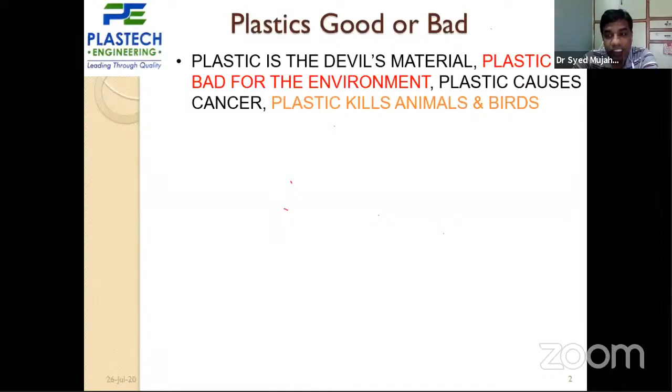Everywhere you can see plastic flowing - on land, on trees, everywhere. A lot of plastic waste is there, and even animals are dying because of this. They eat these plastic bags, plastic bottles which are small in size.

Plastic is normally a non-degradable material. If you keep plastic as it is for 100 years, it will remain the same. It may not destroy like normal metals and other materials which are biodegradable. So because this material is not biodegradable, problems are coming.

So wherever this plastic is there, does this plastic come itself? Is it grown on trees, or planted on the land, or grown in the sea? No, right? It's not given just like that, it's not grown there. It is we people who are not using it properly. After using it, we throw the plastic bags and bottles wherever we want.

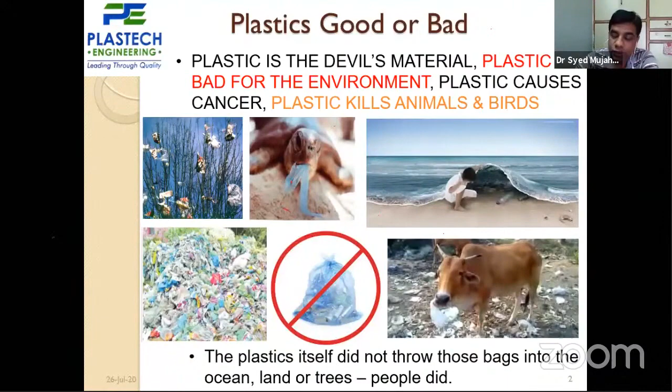If we handle plastic bags properly, and properly recycle them, whatever pictures you've seen previously may not come about. We shouldn't talk about the bad effects of plastic, calling it a bad material that causes cancer. All these things are just an attack on the material - it's just a perception of individuals. As such, plastic is not at all bad.

Anybody can say that after this presentation. If something we are doing - if a student is writing an exam in a class of 60 students, for a subject like production technology, material science, design, mechanical or computer science, whatever subject - and the student fails the exam, who do we need to blame?

Do we blame the pen which wrote the exam, or the student who is not prepared well, or doesn't have sufficient knowledge, or didn't attend the exam or the classes? Whom do we need to blame? We never blame the pen, right? Who is writing the exam.

But here, what we're doing with plastic, we're doing the same thing - we are blaming the pen. The student failed because the pen was not written properly. Is that correct? That's a myth, right? This is a wrong perception, and we need to remove that perception.

Whatever plastic is there, if we have a proper disposition system, as a person we need to throw plastic bottles or bags in a proper place, and send it for recycling, then these problems never come. Proper disposition systems are there in most developed countries, I can say.

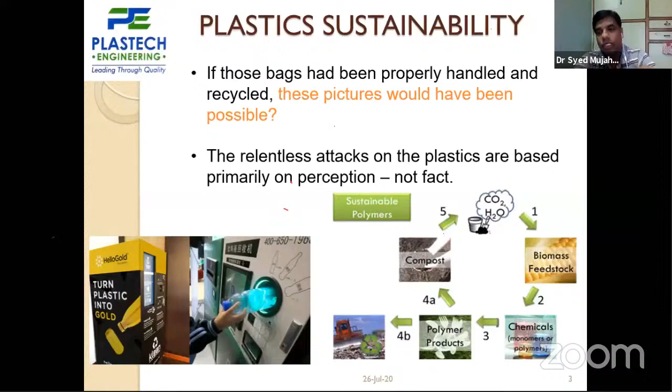Almost all polymers are basically hydrocarbons. Along with the hydrocarbons, we may have other elements like fluorine, chlorine, and other things. Almost all students studied about polymers in organic chemistry, in 10th or 10 plus 2, so you know about all the polymers.

All these things have to be taken care of by us as individuals. 80% depends upon persons individually, and we also need a system. Municipalities or government have to take care of that and put in place a proper system for disposal of plastics, sending single-use or multi-use plastics to recycling plants so they can be recycled and reused again.

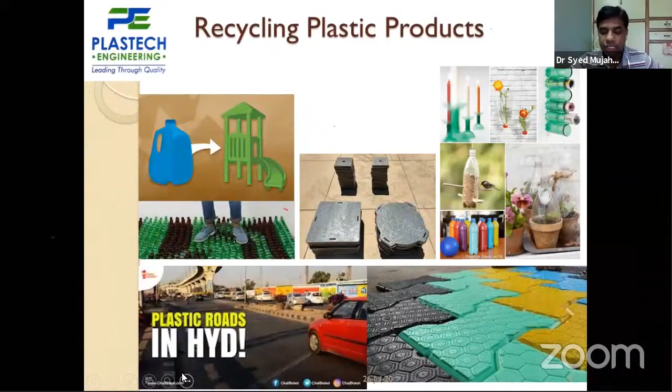So whatever things we are using, like plastic, instead of scrapping it and throwing it on the road, we need to send it to a recycling process, and in that recycling process we can use a lot of things.

The second perspective coming up nowadays is, why use carry bags? Go for paper bags. Now if you go to any super bazaar, people stop giving you carry bags or plastic bags. They're using either cloth, fabric bags, or paper bags.

Because price-wise, cloth bags are a little higher in price, that's why most supermarkets keep paper bags. So I want to show you the differences between paper bags and carry bags, and whether paper bags are really good compared with carry bags.

So where is this extra 82% energy coming from? Mostly 80% of our power comes from thermal or hydel power plants, where we burn fossil fuels. By burning fossil fuel, we liberate carbon dioxide, carbon monoxide, and other harmful gases.

So think about how much energy is required. Almost 6 times more fuel is burned to make one paper bag compared with one carry bag. So in terms of energy consumption, carry bags are good.

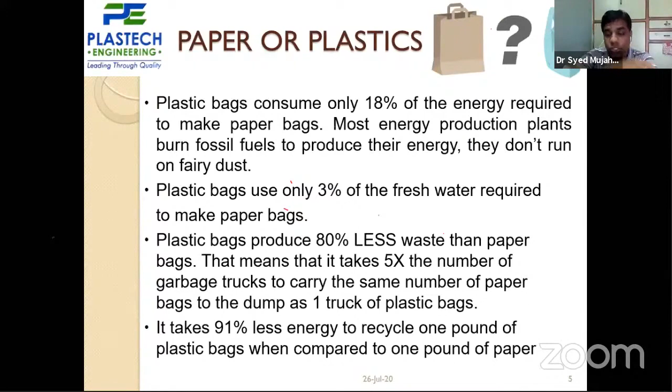Now we're going to cover the basics of plastic. Everybody knows plastics are nothing but polymers. The word plastic comes from the Greek word 'plastikos'.

The meaning of plastikos is moldable, so any moldable material is called plastikos. Plastics fall under organic chemistry, which you may have already studied.

Plastic is a polymer. In a polymer, there are a number of mers. A single unit is called a monomer. When monomers join together, hundreds of thousands of monomers form a big chain of molecules.

This is a unique class of material, a very good material actually. You cannot find this kind of material elsewhere - it's a wonder material that came into existence by virtue of its superior performance and cost effectiveness. The cost of plastics is always less than the cost of any metal. So this material, I call it Chiranjeevi - because it is always live. There is no end for plastics.

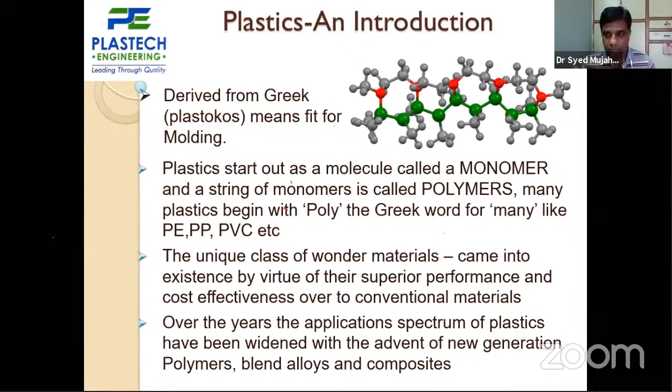Recently, I presented at an exhibition cum conference at IIT Bombay. There is a lot of research happening at IIT Bombay as well as IIT Kanpur, IIT Delhi, especially on degradable plastics - so that whatever animals or birds consume, it may not affect them, it can be easily digestible. Even in the ocean, it can degrade after some time, maybe after a few days or weeks, and mix with the water. This research is still going on.

This is the basic history of plastic material - I'm not going to cover this in detail, you can get it elsewhere. Initially, the symptoms or existence of plastics were there in 1800 BC. If you take the Egyptian pyramids, the royal tombs, if you visit anytime, you can see some existence of plastics there. So Egyptians used plastics in 1800 BC, meaning almost 4,000 years compared with now - for the last 4,000 years, plastic has been in use.

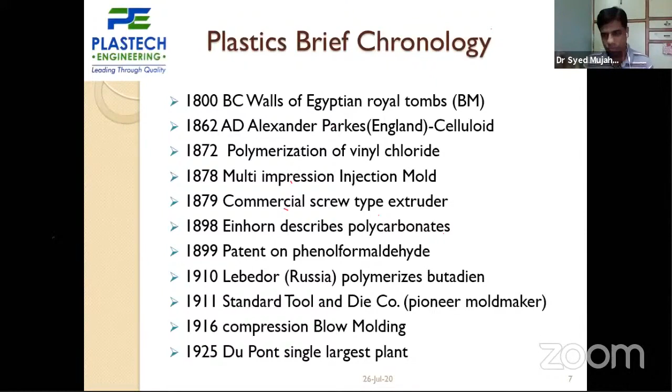But plastic in industrial and domestic use came in 1862, when people invented the polymerization process. In organic chemistry you studied about polymerization, where chains of elements form - this process is called polymerization. When we invented this process, plastic became generally usable. From then, there has been a lot of periodic revolution happening.

A lot of new materials like Teflon, Bakelite, which are used for engineering applications, were invented. Polyethylene, polypropylene, polythene are used for carry bags. PET, polyethylene terephthalate, is used for water bottles. All this material was invented periodically, and as new material is invented, its use keeps increasing.

One more myth I discussed - plastic causes cancer. Was it a fact a few years back? Yes - if you keep eatable foods in plastic containers for a long time, there is a possibility of some kind of harmful elements forming. This especially happens with PVC, polyvinyl chloride.

PVC pipes are normally what we use in our homes. PVC is normally banned - in the late 1980s and 90s, it was banned for use with food items. So we use PVC, but not for food items. Instead of PVC, for food items we now use what's called food grade plastics.

There is a special category of plastics we use only for packaging water, edible oils, or whatever food we consume - these are not packed in PVC. So PVC may cause cancer, but PET or PP, polypropylene, is used nowadays. These materials do not cause any kind of cancer.

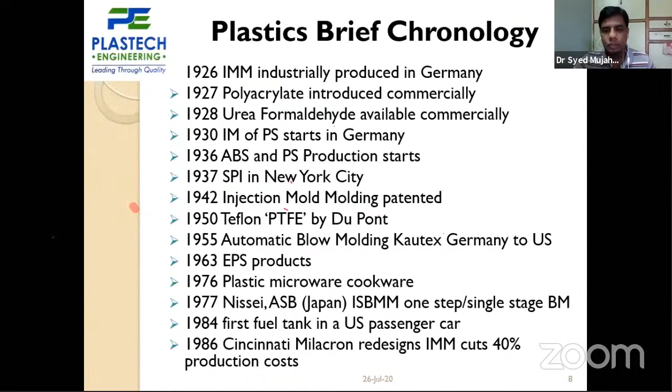So coming to the advantages, I hope everybody knows the advantages of plastics. It's corrosion resistance - it's not reacting with the environment, so no corrosion. Chemical resistance - even some kind of acids you can use in the plastic, it cannot have any reaction.

Flexibility - it is more flexible. If you want to heat the material at some particular temperature, it becomes flexible and can deform into whatever shape you want. Even if you want to change the shape again, you need to heat it, and the flexibility comes back. So because of this flexibility, we can recycle the plastic material. And plastic material is very light in weight, low coefficient of friction, leak-proof joint compared with metal or maybe ceramic.

Containers, if you take, it's having sustainability. So the main advantage actually is the sustainability, but this will become a disadvantage now because of mishandling of polymers and plastics by us.

So cost effective - definitely it is a lesser price if you compare the price of a plastic container with the price of other material. Just as an example, take glass. Previously, 15-20 years back, most of the cool drinks used to come in glasses, right? Calcium or maybe sodium glass material we used to use.

So those glass materials are a little costlier than plastic material, and also they're heavier, and also they're not flexible - they can break if fallen from our hand. Those glass bottles used to break. So nowadays glass is completely being replaced with food grade plastic.

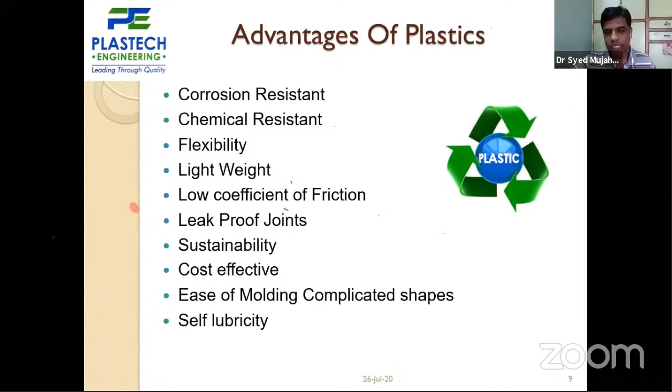And it's self-lubricating also because friction properties are less. Then coming to the further fundamentals - I think everybody knows plastics are nothing but polymers.

You can classify them into two categories: thermoplastics and thermosets, right? So the polymers - we can call them plastics, thermoplastic and thermoset plastics. Thermoplastics normally we call recyclable plastic, which can be recycled.

So thermoplastic - maybe you studied in material science as well as chemistry - when you heat the material, it will soften. You need to make it into whatever required shape, give it the shape, and cool it down. It becomes hard now. So this is a recyclable material.

Those recycling properties come because of very light cross-linking in thermoplastics. Every plastic is made of long chain molecules, and these chain molecules are cross-linked by chemical cross-linking. This cross-linking is very less in thermoplastics, so whenever you heat the material, that heat energy breaks this cross-linking and makes the material flowable and soft, so you can make it into the required shape.

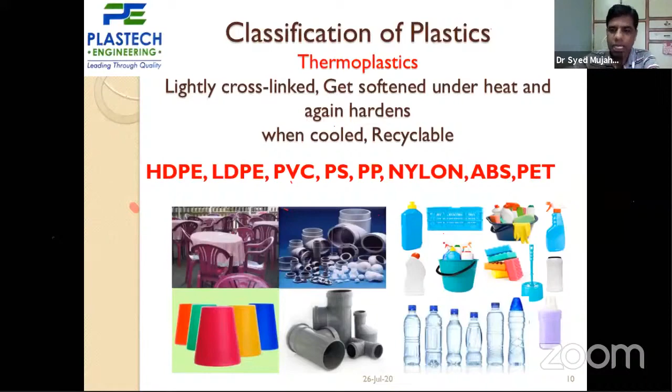The normal examples of thermoplastics are HDPE (high density polyethylene), LDPE (low density polyethylene), PVC plastics, PP (polypropylene), nylon, ABS, PET. So all these things are thermoplastics actually - they can be recycled. And the second category is thermosets.

Thermosets have more cross-linking. Compared with thermoplastics, the cross-linking between the molecules is higher in number. So breaking this cross-linking is not easy - it's not possible actually. That's why this material cannot be recycled - we cannot reuse it again.

So by melting, by heating it, once you set the material into a form, it stays in that shape only. For example, if you take thermoplastic, it's like water - if you reduce the temperature, water becomes ice.

If you're increasing the temperature, it's converting into water, so it is recyclable water, right? But if you take an egg, it's not recyclable. Initially, egg is in a liquid form, but once you boil it, once it takes some higher temperature, it solidifies. It becomes solid, and once it becomes solid, it can never be converted back into a liquid form.

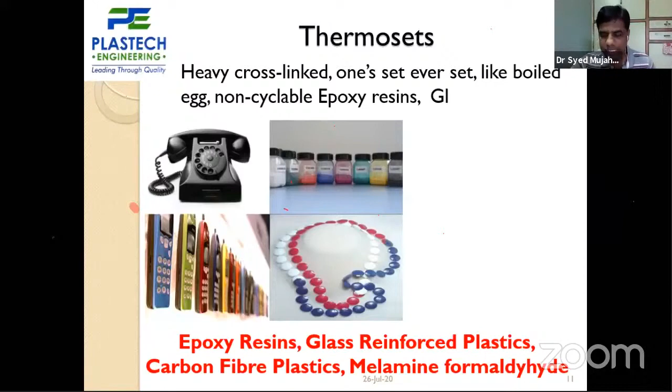Same thing with thermosets. Once you make it into a form or material, whether it's electronic equipment or electronic appliances, whatever, once you make it, it cannot go back to any other shape. It has set in that shape, you cannot change it. This happens because of high cross-linking in the molecules. Examples are epoxy resins, glass reinforced plastics, and nowadays carbon fiber plastics. All these things are non-recyclable. This is considered as thermosets.

Engineering plastics include ABS, which is nothing but acrylonitrile, butadiene, styrene. So ABS, SAN, nylon, PMMA, where PMMA is nothing but polymethyl methacrylate. These materials are used for engineering applications.

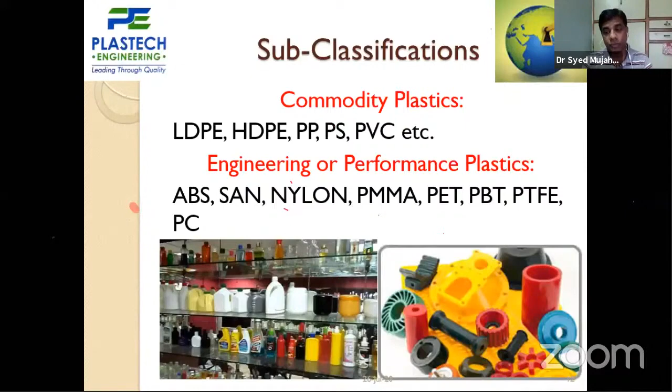In engineering applications, normally the strength of these plastics is higher compared with previous materials like LDPE, HDPE, and polypropylene. Nylon and ABS have higher strength, and because of this high strength, they can even withstand high temperatures. Normal plastic melts somewhere about 100 to 450-500 degrees centigrade. Commodity plastic normally melts somewhere about 150 to 200 degrees centigrade, whereas engineering plastics can withstand even 300 up to 400 degrees centigrade.

If you take plastic consumption worldwide, USA is racing ahead, almost 68 kg of plastics consumed per person every year in USA, whereas in India it is hardly 8 kg of plastics per year consumed per person per head. So we are very less in consumption compared to them.

I think this kind of problem we are facing can be solved if we have a proper system, and we need to decide not to throw plastic bags or any kind of things in open places. We need to have a proper disposal system.

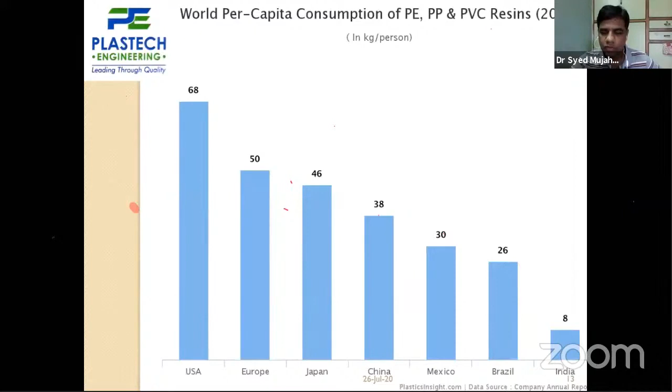So, a glimpse of the Indian plastic industry: it's very promising. Actually, in 1890 itself plastic started being used in other countries, but in India it came a little late. After we got independence in '47, almost after 10 years, we started manufacturing plastics in 1957.

As per the 2015-16 industrial report, we used to make 7.64 billion US dollars every year from this plastic industry. Domestic consumption was expected to touch nearly 20 million metric tons by 2020. This was the 2015-16 prediction, and we've almost reached that.

More than 2,000 exporters from India are exporting plastic to other countries, and because of this we are generating a lot of foreign currency. Almost 10 million people are directly or indirectly dependent on this plastic industry.

Almost 30,000 plus processing industries are there across India, pan India. Of that, 80 to 85% of industries are small scale or micro industries. I hope you know what small scale industries and big industries are. If the turnover or expenditure is less in any industry, that industry is called small. Most of these micro, small, medium, and heavy industries are classified based upon their expenditure as well as turnover.

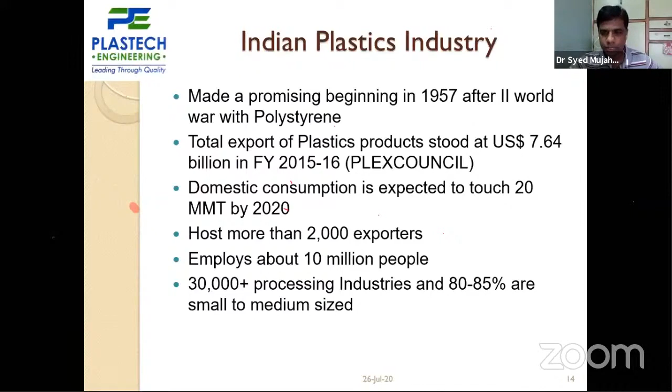Maybe I can discuss that in the last part. So India's plastic industry is exporting raw material, extruded products, polyester films, a lot of plastic articles, automobile components, sport goods, even surgical equipment. So a lot of things we are exporting from India to other countries, with excellent potential strength in terms of availability of raw material.

We used to have very good raw materials available in India. Capacity, infrastructure and skilled manpower is available. And in India, we have one more institute, CIPET - Central Institute of Plastics Engineering and Technology. This CIPET has centers in most of the major cities, including Hyderabad.

In CIPET, they mostly focus only on plastic - plastic processing, plastic entrepreneurship, plastic research, and all these things are happening. Even students can get trained there. They have short-term courses as well as long-term courses available. They even offer master's diploma courses as well as master of engineering courses.

They also tie up with universities. In CIPET Hyderabad, they have a tie-up with Osmania University as well as JNTU, offering master diploma courses as well as Master of Technology, MTech, in plastic engineering.

So plastics play a significant role in economic growth, because you see how much revenue is coming in foreign currency - we are generating very good revenue from this plastic industry. There's a significant growth rate of almost 16% in plastics. I think in India, except for the IT industry, no other industry has this much growth rate every year.

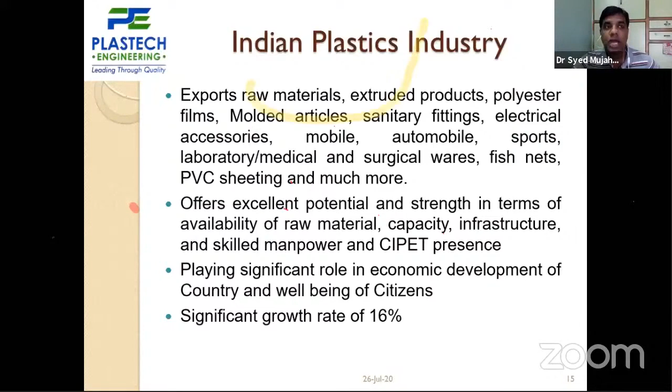So 16% every year it's increasing. That means within 5 to 6 years, our production capacity will double. Our demand for the material is almost doubling. So this much growth is nowhere - no other industry has this.

Also, nowadays this is Corona time, so we are in a pandemic, and a lot of medical issues are happening. So in that, even plastics are being used for medical applications also.

I think some disturbance is coming. Maybe the host can take care of that. So maybe I can continue.

Anup, hello, am I audible? Yes sir. Okay, you can continue.

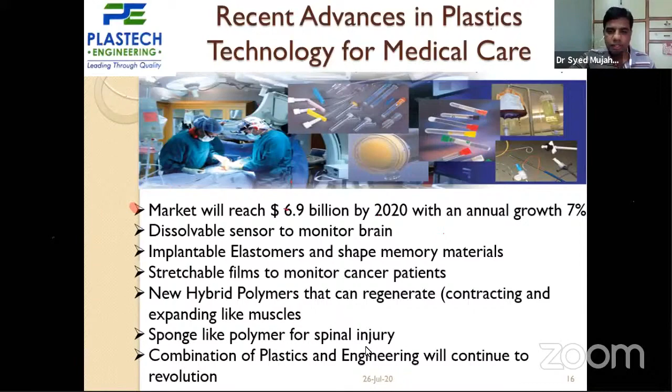So actually my presentation starts from here. All this was only to introduce you to the industry and motivate you to listen to these things - the processing of plastics, which depends upon the material.

Most of the raw materials we use in plastic processing are in powder form or in granule form. Granule form is nothing but some kind of big lumps - what we call 'dana' in Hindi. Dana means nothing but a kind of lump, like seeds - take tur dal or some kind of dal. So granules are nothing but like seeds. The raw material for plastic we're using is powders or seed form.

This material has to be put in the machine and melted there. After melting, it is formed into the required shape. Like with metal, we have different kinds of manufacturing processes. Of the two basic manufacturing processes, one is melting the material and pouring it into a die or cavity to get the required shape - this is called the casting process. Here too, we have the same kind of casting process.

The second process is metal forming. In metal forming, we don't melt the material - we heat it to an elevated temperature where the strength decreases, and once the strength decreases, we deform the material into the required shape. In plastics also we do the same thing - with melting the material, the process is called injection molding, where you melt the material. So we have injection molding, extrusion molding, blow molding, etc.

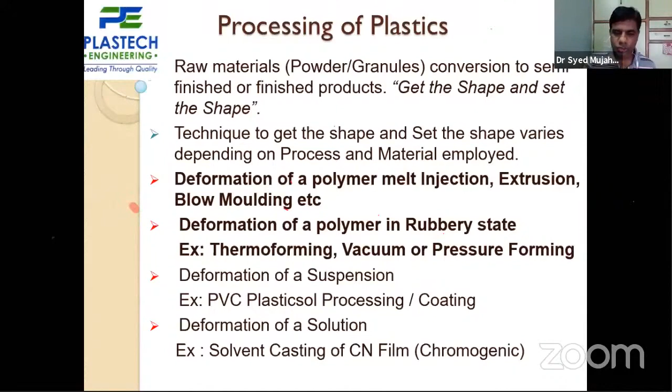So this third and fourth technique is that one. I'm not going to discuss those techniques. I'm discussing only two techniques: melting and forming.

Selection of process is mostly depending upon the performance requirement - what is the end use of the product, or which kind of material is required, whether it is polypropylene, polyester, or maybe PET material. Depending on the material, our processing techniques will depend. Also the operation terminology, whether we are doing it manually, or on an automatic machine or semi-automatic machine. Based upon that, your final product will depend.

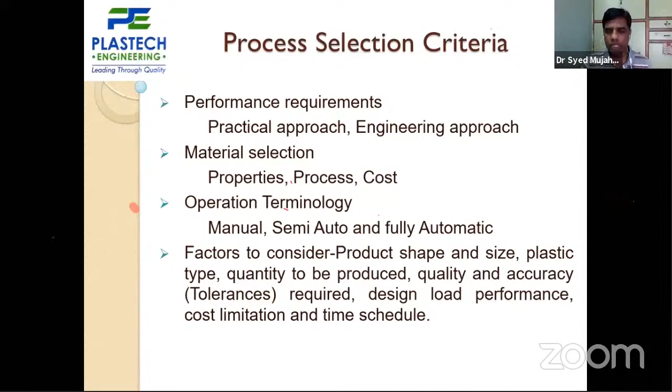A lot of other factors are also taken into care, depending upon weather condition, availability of materials. All these things are taken care of when you are processing. So coming to the processing techniques.

So one of the important processing methods in plastics is injection molding. I think mechanical students may be aware about this - in your production lab, you have done some injection molding experiment. In that, whatever granules, whatever the 'dana' I told you, those granules have to be put in a hopper.

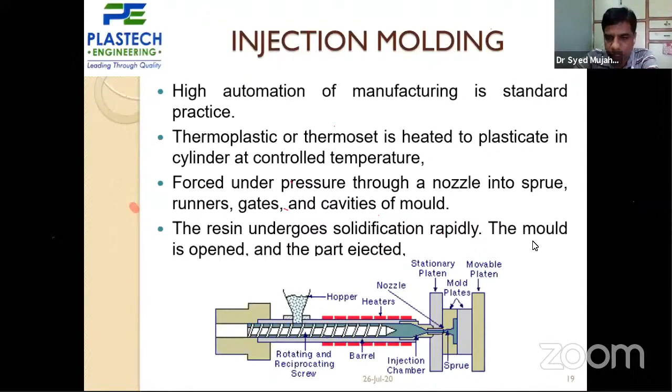Screw, so material is depositing from here and it is coming here, and here there are some kind of heaters. So this is actually the control system.

Nowadays most of the equipment is becoming sophisticated. It is loaded with software and electronics, and computer support systems are there. So whatever you're seeing here is an automatic injection machine.

Only thing is you need to feed the raw material. Even raw material feeding has separate hoppers, vacuum hoppers. So directly wherever the reservoir of raw material is there, you need to collect it directly here, and from this it is collecting from there.

After completion of the process, whatever object is there, this is collecting here. Even fully automated machines use some kind of robotic arms. Once injection molding is completed, when the two halves of the mold open, the robotic arm comes in, picks that material, and deposits it somewhere. It is keeping it on the conveyor, and from the conveyor it goes wherever it's required, and there it is packed.

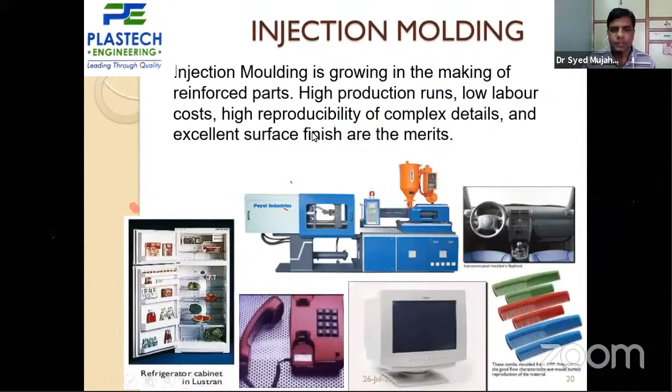So the process using injection is called injection machines. Coming to the next process, this is the extrusion process, the extrusion operation. It's similar to our extrusion.

In metal extrusion, what we used to do is keep the hot billet at the die and force the billet to pass through the die opening. When it comes out, whatever shape is required, if our object is a circular shape, the die opening has a circular shape. If you want a different shape of object, we need to make the die opening in that particular shape.

Here also the same principle applies. The same thing, whatever the injection machine portion you're seeing, in extrusion also this part is the same. Only difference is this die. There we used to call it a mold, I told you. In the injection machine, whatever you're using, we used to call it a mold.

There is no continuous process here. The injection process is a discontinuous process. Every 5 seconds there is a cycle time. So every 5 seconds or every 10 seconds, you are getting the object, right?

Here it is a continuous process, extrusion. So here's a hopper. From the hopper, raw material is coming in, and because of this screw action, material is moving forward.

It's continuous, there is no forward and backward movement in this. Because of continuously depositing the material, and the screw rotating, the material is moving forward, and because of this force, the material is feeding through this. So continuously the material is coming out, and here we have a lot of other setups, cooling setup as well as sizing setup.

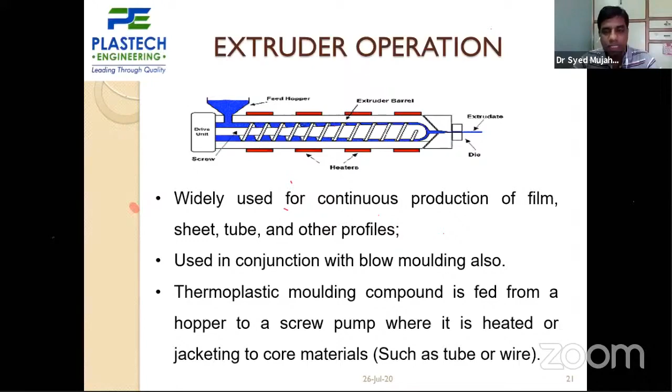This is widely used for continuous production like wires, films, sheets, tubes. Sometimes, along with the extrusion process, we use some other activities also to make other components, which I can discuss in the next slide.

Here we have a die, giving a typical shape. Once the material is passing through the die, it passes through some kind of calibrator. The calibrator normally measures, if you want to make a pipe, it measures the outside diameter as well as the thickness of the material.

If anything is uneven, it directly gives that response to the back control system, and it controls the material flow. If thickness changes, or diameter changes, or some kind of distortion happens in the die, we need to stop the process and change this die. These kinds of things have to be taken care of by this calibrator.

Once this continuous process starts, the material comes here and the material is pushed forward from here up to the end. Because this is a hot material, even though it cools down to some extent in the die, the temperature is still not reaching room temperature. The temperature of the pipes or wires is still higher.

So here we have some cooling arrangement. Mostly we use water jets, which carry away the heat from the material and cool down the temperature of the pipes to normal room temperature.

And here it is a traction. The traction normally measures how much material is coming out and what is the quality. It measures initially, and it measures again at the end.

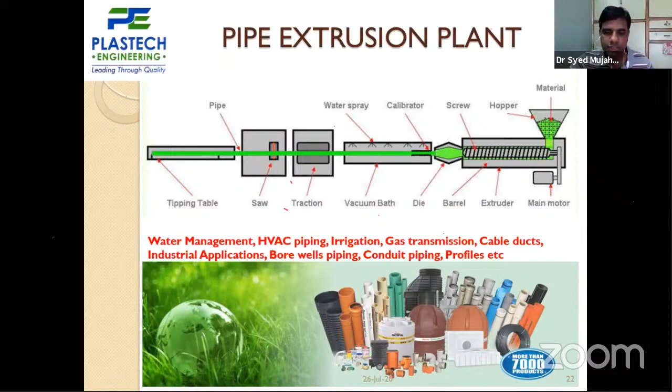So the third manufacturing process of plastics is blow molding. I think the time also running out, it's almost 11:55, so I'll do it faster.

Here you have an injection setup. From the injection, wherever the die opening is, the material is coming out. Initially when it's coming out, as you may have seen previously, we have some kind of cooling arrangement in the die, but here we don't keep that cooling arrangement. The only thing is we allow the material to just solidify.

For example, if you take the melting temperature of polyethylene, it's somewhere about 120 degrees centigrade. Whatever temperature is coming out here, it's somewhere frozen, but the material is still not reaching room temperature - it's at 100 or 110 degrees centigrade. Even though it's in a solid phase, it's not as strong as at room temperature. So it's like a semi-solid, I can say, it's in a semi-solid condition.

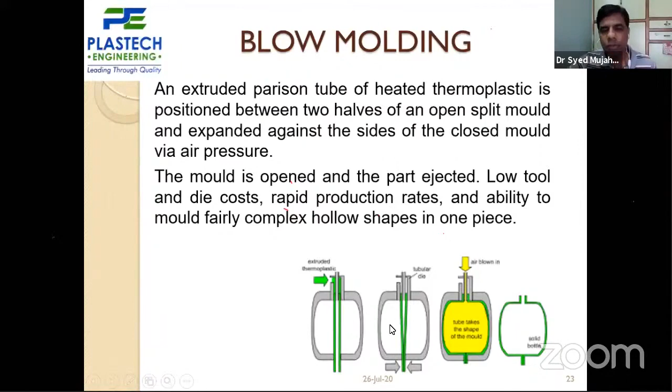When we supply a high pressure air blow, the material takes this shape, which is the final container we want. Initially there's some opening because we introduce compressed air, but finally it's completely closed. Whatever excess material remains, once we make the object, is cut and scrapped, and this excess material can be reused. This process is called blow molding because we use air blow.

In blow molding, there are two different kinds of processes. One is extrusion blow molding. If you see here, whatever material is coming out comes through an extrusion process, so that's called extrusion blow molding, which is what was just explained.

The parison comes in, the die closes, and air can come from the top or from the bottom, wherever the provision is there. Air comes in and holds for some time, and here also, like the injection die, we have a cooling setup. After some time it cools down and reaches a solid state.

Then we can move this. In this process also you have two dies, a movable die and a fixed die. Initially it is at a distance. The frozen material reaches almost room temperature, or just 20 to 30 degrees above room temperature. This material becomes sufficiently strong, and then we can remove it. Once removed, the process starts again.

Again some material is injected and extruded, coming in, and the die closes. This whole process, from the initial stage to the last stage, is called a cycle. The die opens again and the process repeats. Every component depends upon this cycle, and the time taken from one cycle to the next is called the cycle time.

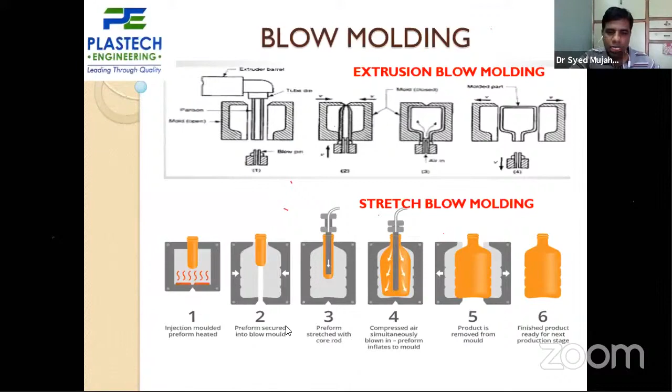This is the object - a 20-liter bottle, the kind used for mineral water. This is the same process even for a 20-liter bottle, or maybe a 10 or 100 ml water bottle; the process is the same. Only the die capacity and die sizes change.

So a few applications of blow molding. All the bottles, jars, everything is made by this process. At the top you can see the material is different - this is HDPE material. Normally HDPE is good for extrusion blow molding, so those materials normally used in pharma applications. But for cool drinks or water, we use PET, which is a transparent material. In PET, we use stretch blow molding.

In these two processes, whatever is on the left side in the bottom is called a preform. From this preform, if you blow air, then only we get this bottle. So it's a two-stage process.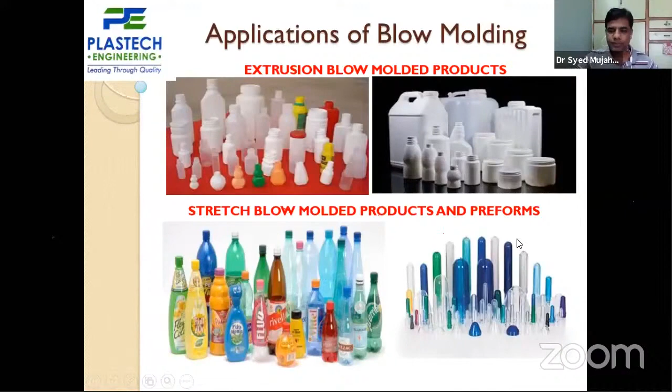So one more process is called rotational molding. I'll go a little faster now because time is coming to an end. Roto molding is normally used for big tanks - whatever water tanks are there in our house, plastic water tanks, Sintex tanks or any other brand tanks. Mostly these are molded by rotational molding, also called roto mold. It's a very simple process, similar to centrifugal casting in metal casting.

Here what you do is take the material powder. Most of the roto molding process, we take material powder or granules, keep them in the containers - this is called a die again. This is a metallic die. You keep the material in it and close it completely. After closing, you heat this mold.

When you are heating, this material is going to melt, and it revolves about its axis. When it's revolving, because of centrifugal forces, the molten material deposits on the walls of the mold. When it is depositing on the walls of the mold, there is a cooling system, so this material freezes. Once it freezes, you remove the second half and you can remove the product.

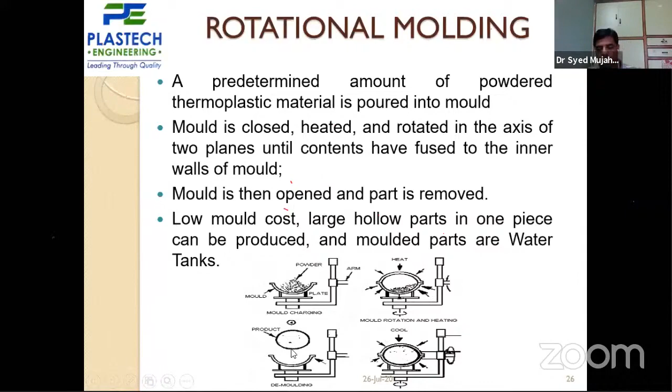So this is a typical setup - the typical equipment of roto molding, and this is typical equipment for water tanks. These are a few applications which we can make through the roto molding process.

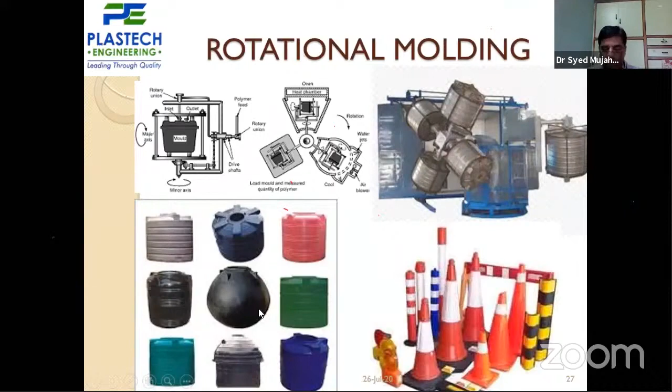And then thermoforming - this is a deformation process. Until now, whatever we've seen - injection molding, blow molding, roto molding - everything is a melting process. But thermoforming is a forming process. Here we are not melting the material; we only heat it to somewhere just below the melting temperature, so the material cannot melt like liquid, but at the same time it cannot stay strong - it becomes softer. So we heat the material and keep it on the die.

This is a typical die. In this we have both vacuum forming as well as pressure forming. If it is pressure forming, we apply some kind of force on this sheet and deform the material - whether the force is by air or by any kind of plunger, like a deep drawing process in our metal forming process. So we're just deforming the material, and when the material deforms, it goes and occupies whatever cavity is there, taking its shape.

So whatever mold is there, we need to make it in the same shape as the final object we want. If you want the final object to be a jar, then the die has to be in the form of a jar. If it is a cap, it has to be made in the form of a cap. So whatever shape the die is, the same type of product we're going to make.

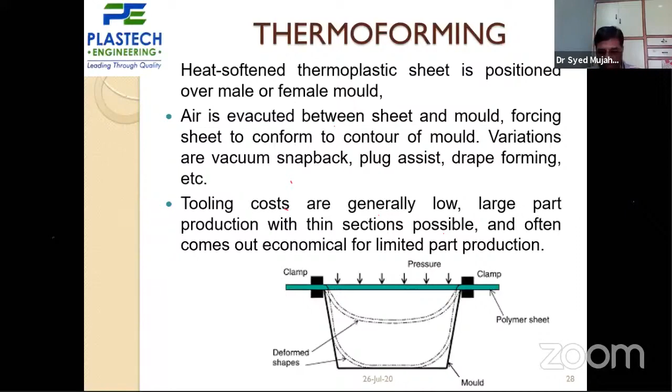Here normally tooling cost is less compared with previous processes, because we are also using air for applying the pressure - only a cavity is required, and that cavity is only needed for one side, completely open. So here tooling cost is less. For applications, this is used for whatever tablets we use, or whatever medical applications you use.

So all these things you can see, a very thin layer of plastic sheets, even food items, so packing of food. If you're buying something in a restaurant, normally they pack it with small, very thin containers. These thin containers are all made by thermoforming. The same thing is possible to make in injection molding also, but this much fine thickness is not possible in injection molding. That's why we go for thermoforming.

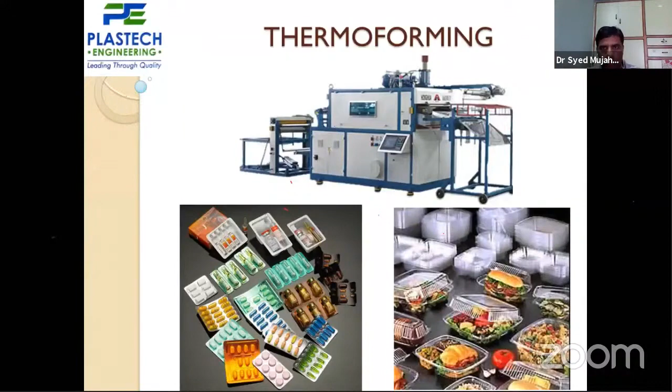Now going to blown film. Blown film is nothing but whatever carry bags we make. Similar to the previous process, here also the material is melted and whatever material is there is forced into a die. So here only difference between the process of extrusion and blown film is this.

Here, in between the die, we have an air blow. So whatever material is coming out, plastic material of less strength, comes out, and some kind of air blow is coming, and this material is completely passing out. When the air blow comes, it tries to expand this material, so it is expanded, forming a kind of bubble, a balloon kind of thing.

This continuously forces upward because air movement is upward. When going up, there is a mechanism where you can remove the air. So the air is separated, and whatever blown thin plastic bags are formed are wound and taken on rollers and finally wound on this winder.

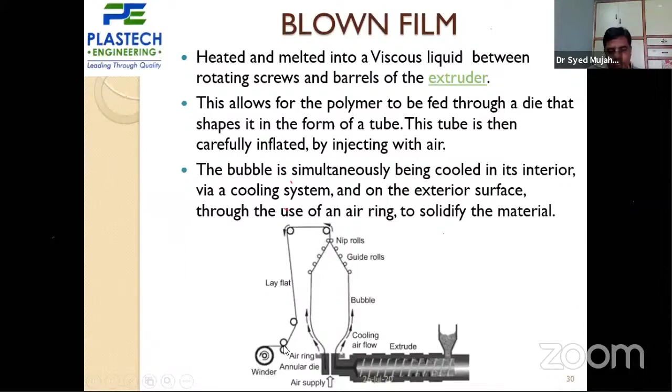This is blowing because of air. When the paper blows out at the top, the air is removed from there, and some kind of packaging takes place. Whatever the second portion is, the thin sheets come out on the rollers, and finally it is wound on this. Periodically, once the wound roll is full, we need to remove it automatically. So finally we get the plastic carry bags.

Nowadays, if you go to any super bazaar, we can find carry bags in this form. Once wound on this, you need to unwind it, and after every length there is a cutting. If you cut it, already inside there is a joining. So this is the typical process of making our plastic bags, or carry bags.

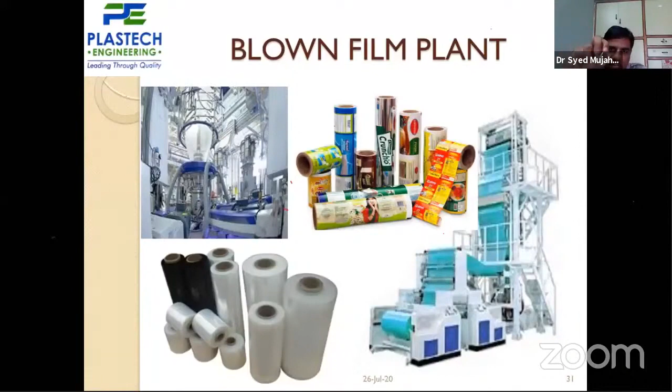After making this rectangular carry bag, they cut it, because normally when you buy a carry bag in the market, it has some kind of handling feature too. So they cut the rectangular bag and make some kind of handle in it, and then pack it. So this is the recent application of plastics in sophisticated technology.

Plastic is also being used nowadays in solar cells, replacing silicon based cells with polymers. Even the aluminum support sheets are being replaced with plastics. Plastics are used for electronic radio frequency, RF tags, especially for space applications; people are using this nowadays. New electricity conducting plastics are also being generated, because plastics are normally very bad conductors.

Now people are working to produce conductive plastics. Graphite is a good conductor of electricity, so using this technology, people are trying to develop conducting plastics, printing silicon plastics, and printing material. In printing, there is a lot of research going on to develop new kinds of plastic material and new techniques.

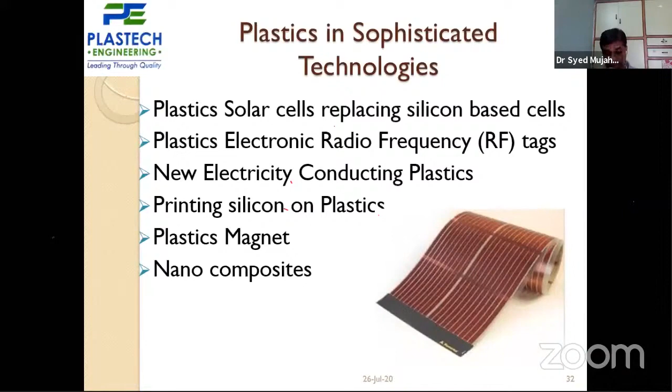Plastic magnets are also coming in. People are working on plastic magnets, as well as nano composites. Nano composites are normally used in polymer composites. So these are the few primary processing machines. I'm not going to discuss this further, as it's nothing but what we already discussed.

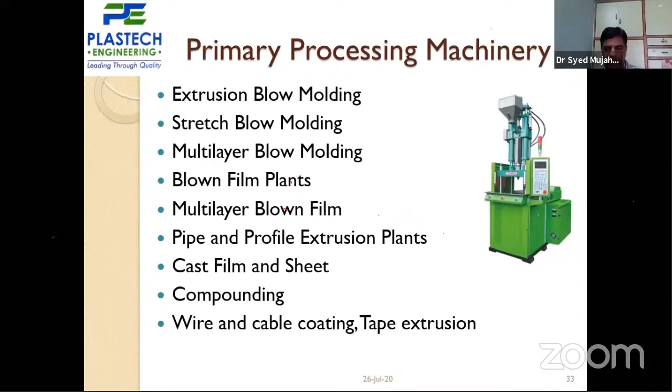So for that, whatever the machine is required - extrusion, blow molding, stretch blow molding, different kinds of machines are there. These are the machines required, and there are a few more machines: injection machines and thermoforming machines. So all these machines are useful.

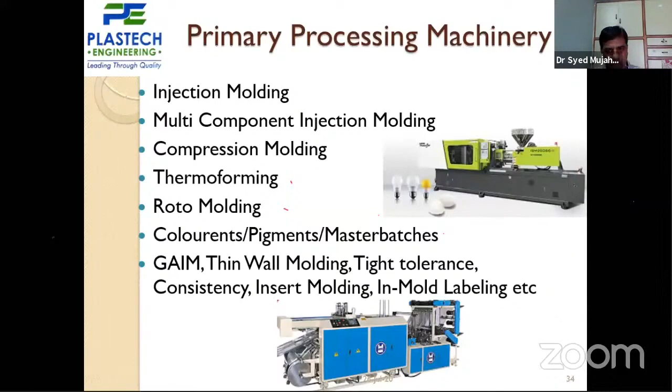This is a typical molding setup. I thought to explain the mold here, so this is a typical mold and this is a typical cavity. Whatever I explained to you, whether it's an injection process, mostly this is a typical injection mold.

So melt is coming here, and it is taking this cavity shape. And here, there is some cooling setup. Inside every mold there is a cooling setup so that they can dissipate heat fast and increase the speed of the process. If this cooling setup is not there, it needs a lot of time to cool down to room temperature. To increase the process, they go for higher water cooling setups. Now most machines use water cooling, but wherever high-end machines are there, the process is higher.

We need to reduce the cycle time, so some special coolants are also used by people. Even nowadays, people are using refrigerants to cool the molds.

So this is a typical mold. This you can see is the mold of a bottle - whatever bottle we are having, this is a 1 liter bottle. So typically this is used - this is the two halves of the mold. Every time you need to remove it, it's directly connected to the machine, so this will linearly move forward and backward. One half is fixed and one is forward and backward.

And here, because water bottles are made by stretch blow - stretch blow normally uses preforms made in injection. So those preforms are fixed here, heated and fixed here. And from the top, we are just blowing air. So when you are blowing air, it is going and taking this shape.

And similarly, this is a mold of a chair. So chair mold - these are two halves, one is the fixed half, one is the movable half. This comes here, and when your two halves are joined together, then you form a cavity. The cavity is similar to this chair.

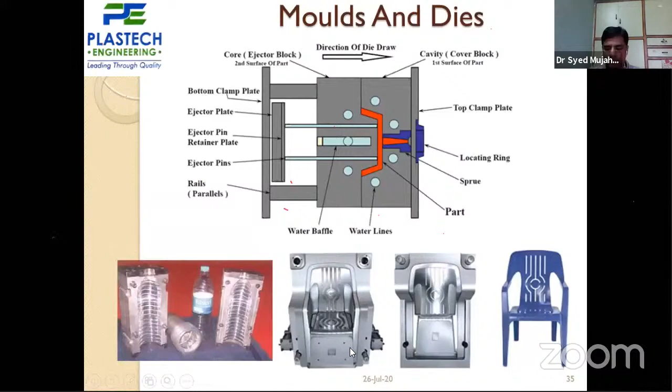Then some auxiliary equipment is required for plastics. For designing anything, we need software - CAD, CAM, CAE software are required. And we need cooling systems. Normally especially for blow molding as well as injection molding, cooling is very important, so cooling chillers or cooling towers are required. Then color measurement and control.

So you see plastics coming in different colors, so intensity of color and color coding, all these things are required. And similarly, especially in blow molding, we need air blow, so we need a compressor. Similarly, dryer, dosing and metering. Whatever you're seeing in the pipe extrusion machine, there are dryers, dosing, forming, measuring machines, as well as cutting machines required to cut that material.

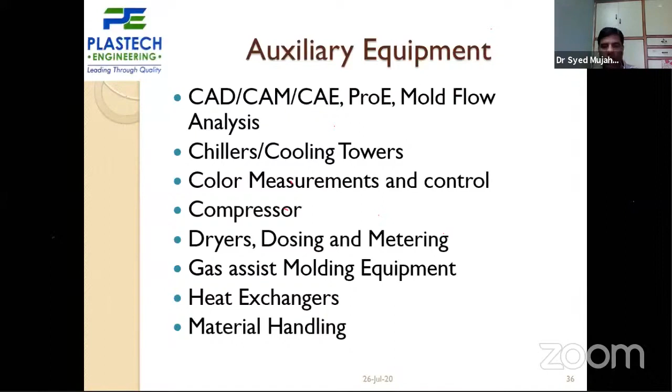Then gas assisted molding equipment like blow molding - gas is required. And heat exchangers, because when chillers and cooling towers are there, definitely there is a requirement for heat exchangers. And material handling equipment - once raw material is poured into the machine, as well as after the component is ready, we need to take out the component and pack it. So different material handling equipment are there. All these things are required for any plastic industry.

So then I'm coming to recycling also. I'm not going to discuss much about recycling. To avoid whatever pollution is happening, one solution is recycling. For recycling, we have different processes. One thing is that normally for thermosets, we go for landfilling, because thermoset plastics are not possible to recycle - that's why they go for landfilling. And then reusing of plastics in their existing form itself, we can use it somewhere so that we do not dispose of these plastic components.

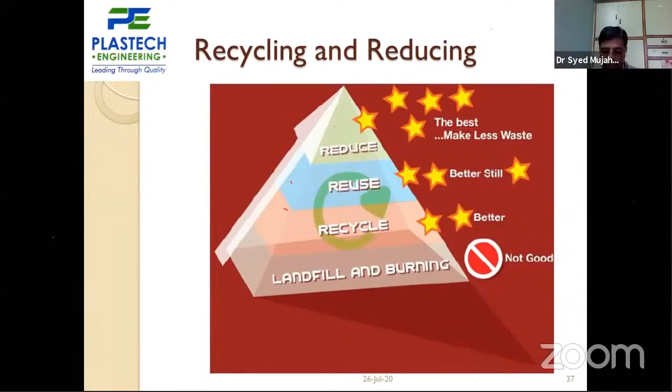Recycling means you need to convert into liquid form again, and go for injection molding or blow molding, extrusion. You need to manufacture the other component. So in this basic mechanical recycling, these are the processes, starting from here.

When you're collecting the waste, bottles from beaches, parks, or domestic homes, we need to collect and transport them. They pack and transport this to an open space, where you grade and sort it separately, because the materials used in domestic applications aren't all the same. Water bottles and cool drink bottles are PET, edible oils are made of HDPE, and pipes are made of PVC. So sorting is required.

Once transported to a normal open yard, we separate and grade them. Once graded, the separate PET material and other materials are packed into bundles. After completely packing into heavy lumps, you put it into the shredding machine, which is essentially a grinding machine. Whatever big objects there are, bottles, caps, or jars, as the material passes through, it completely breaks into small pieces.

These small pieces, if you take bottles as an example, have a lot of dust and dirt inside and outside. If you wash before shredding, you can only clean the outside. To clean the inside, normal recycling plants will wash initially as well as after shredding. Preferably after shredding, washing removes whatever dirt is there.

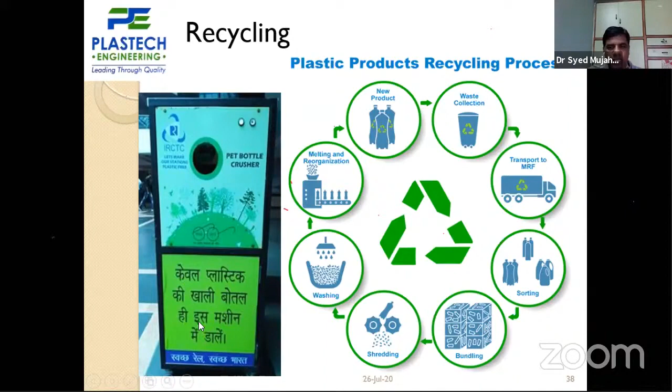You can also start this kind of collection of water bottles. So PET bottles you can crush and collect in this. Once you put this in the opening, if you keep the bottle there, it will crush and make small pieces. There's even a shredder in this, what I call the grinding machine. Finally you get small pieces depositing, and periodically people remove this material and send it to manufacturing plants.

This is a typical range of different plastics we use. Normally on any plastic component you see numbering like 1, 2, 3, 4, and this numbering represents the material type. Number 1 means PET material, polyethylene terephthalate. 2 means HDPE, high density polyethylene. If it's number 3, you'll see this kind of logo on the plastic package. If it's 1, that means it's made of that particular material. For example, if it's 5, that represents polypropylene.

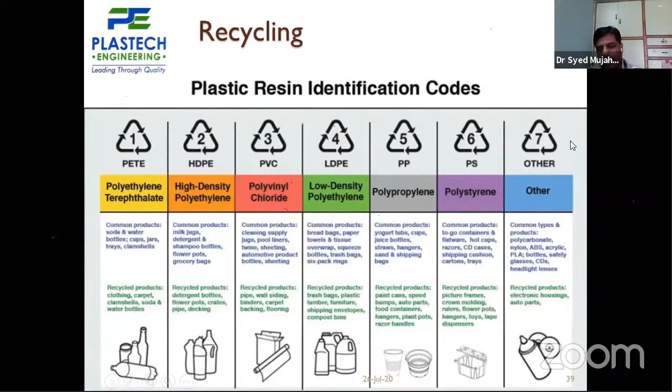That's why this is graded as 7. So in recycling, there are some limitations. The most important limitation is we need to grade the material, identify the material, identify the plastic bottles, and if we don't have that numbering sticker, it is very difficult to identify.

So blending and composites require mixing. Different sizes and shapes of objects are there, so blending is different. There is also a limiting number of cycles, as I told you, we cannot go for an infinite number of cycling processes. As one cycling process goes on, the quality of plastics decreases.

If you take the water bottle, different brands are available in the market. If you take a branded bottle like Kinley or Aquafina, the quality of the bottle is good, especially the transparency. So the transparency of the bottle is very good.

If you take the local brands available in Hyderabad as well as in every city, they used to go for recycled material. Normally recycled material cost is less, so as the cost is less, at the same time the quality of plastics also decreases.

Quality here means strength may be good, but clarity decreases, because normally we measure the quality of PET depending upon its transparency, how clearly we can see through it. For local brand water bottles, the clarity is less, because the local manufacturer goes for a lower price, and a lower price definitely means the manufacturer is using recycled material.

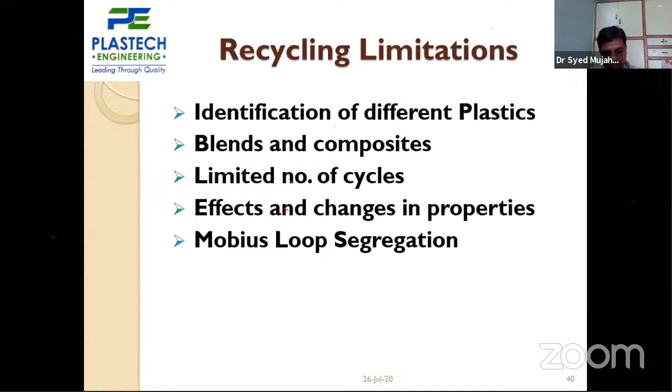So this gives a limited number of cycles. These are a few of the limitations. So then we go for chemical recycling to overcome this. We need to do chemical recycling.

In chemical recycling, what do we do? Previously in mechanical recycling, we are not converting into monomers. We keep it as it is in physical form. That physical form changes phase, melting, and we can solidify it into the required shape.

But in chemical recycling, you need to do some kind of chemical reaction, and we need to separate the elements into their monomer size, then make them into a fresh polymer. So chemical recycling is a process by which polymer is chemically reduced to its original monomer forms, which can eventually be processed and remade into a new plastic as fresh material.

So if you go for chemical recycling, whatever limitations I just discussed, the quality of plastics may not come down. So you're going to get the same quality of plastics. But the only thing is, because chemical reactions are involved, the cost of the process is higher.

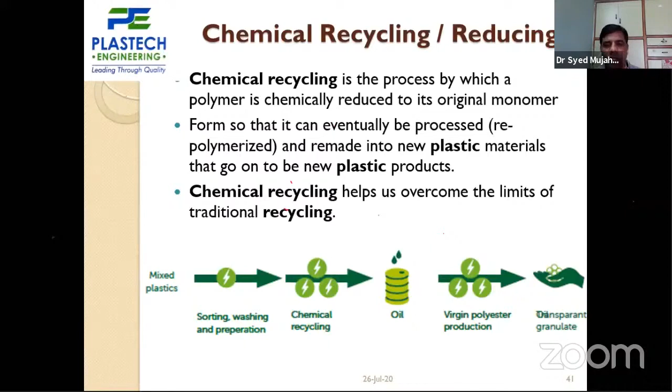So this is a typical chemical recycling plant layout. We need to collect the waste, and we need to go for some kind of gasification as well as liquefaction, and convert it again into a monomer. Then with that monomer, you again do the polymerization process.

After polymerization, it comes in the form of a liquid or gases, and that liquid and gases are hydrocarbons. In those hydrocarbons, you do some chemical bonding between the big chains of molecules, and again you can form the material as a new, fresh material.

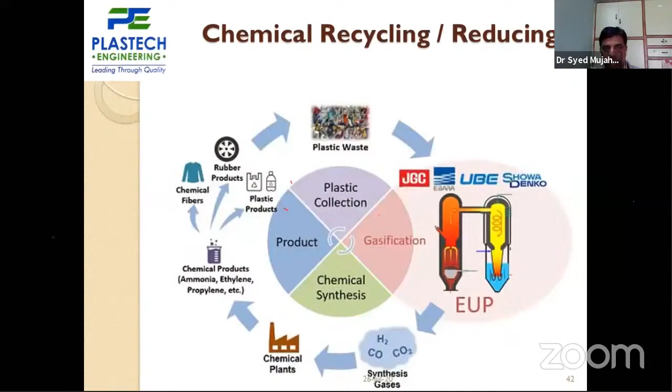So nowadays, the recent development in plastics is bioplastics. Normally plastics are extracted and generated from petroleum products. In petroleum, whatever resins are there come from the petroleum product, and from that we manufacture PET, PVC, and whatever we've discussed. All this material comes from petroleum products, which are not degradable, they will always be there.

So now people are working to go for biodegradable plastics. These biodegradable plastics are produced from plants, by converting starches, sugars, or carbohydrates from different vegetables, fruits, or agricultural products, making those elements into polymers.

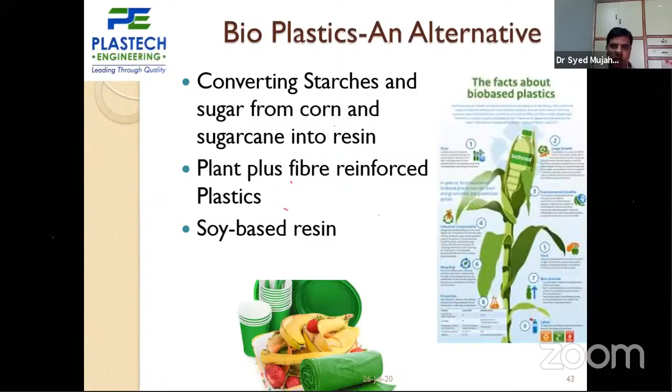Just before winding up, let's go over plastic consumption. Different applications have different consumption levels. The highest usage of plastic is packaging, at 24%, and agriculture is the second highest consumer at almost 23%. I am also involved in packaging—whatever products I manufacture in Plastech Engineering are packaging equipment.

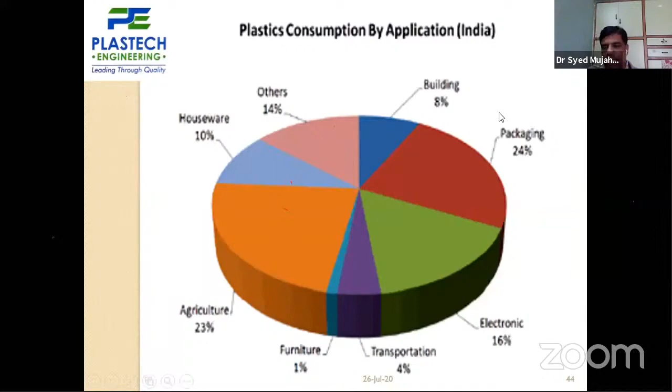These are the different kinds of materials. The most popularly used material is polyethylene. Polythene is used for carry bags, containers, and different applications. PVC and PP (polypropylene) are also used nowadays. PET, polyethylene terephthalate, is also one of the polyethylene products. Water bottles, refrigerator bottles, and cool drink bottles mostly use PET, with one more terephthalate element added.

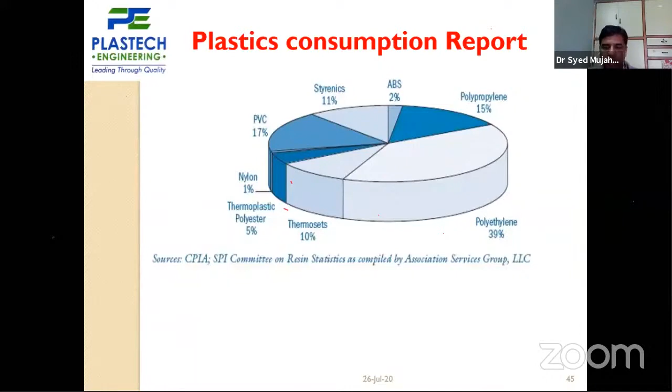For example, thickness—when I used to manufacture thousands of bottles of a certain size, I would first make a few bottles and check the thickness and weight. If everything is fine, then I would go for continuous or mass production.

Once mass production is done, we go into quality checking. Periodically we need to check quality—even though you set all the parameters initially, during continuous production random checking is required. You studied about quality control in production planning and control, including periodic and random checking—that random checking we used to do.

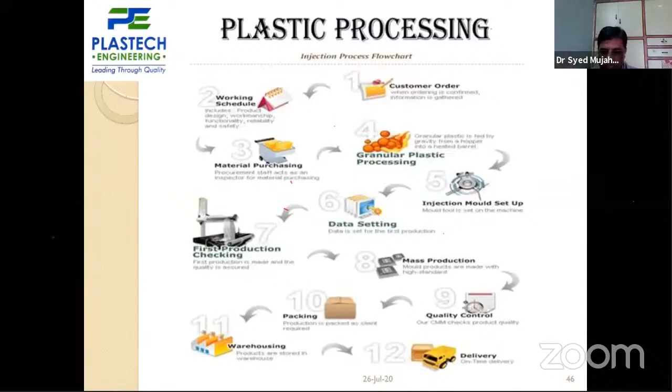In this, people can choose any process and have very good scope in any one of them, whether it's processing—because I'm involved here, somewhere around the fifth step, the processing of plastics, where processing and quality control are all involved. So one process or multiple processes, you can choose. These are the 12 basic steps for manufacturing any plastic component.

There are constraints and challenges, and some challenges are always there. To overcome these challenges, you can give solutions, and it will be a good prospect for you. Skilled manpower is required, and troubleshooting—whatever problems come up in operations, we need to give a solution.

Mold designing—every component has to have a mold. Whatever components you have, like your mouse, is also made of plastic. To make this, we need hundreds of different parts, and most of these parts are made of plastics. Each part needs to have a mold, so mold designing and testing facility and certification are required—there are agencies that certify, as I told you about food grade plastics.

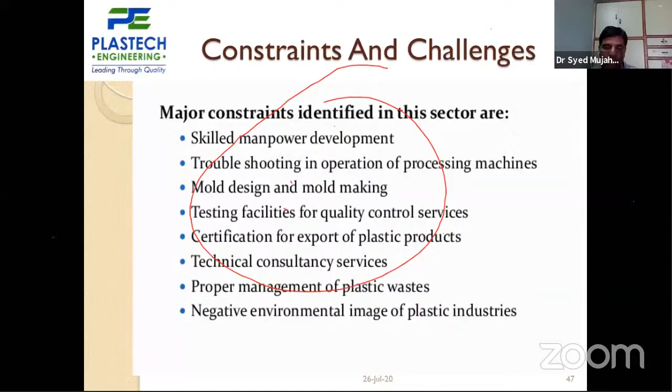Even food processing certification is required. Proper management of plastic waste is most important, especially in India. So proper management or disposal system and environmental control—these things are required.

So opportunities in the plastic industry—these are a few opportunities you can have: raw material manufacturing, additive manufacturing.

Additive manufacturing means, as I told you, plastics are made of powders or granules—that is PP or PVC. But we need some kind of coloring, so sometimes we need to add an extra agent so that the strength of the material can increase. So those kinds of additive manufacturing machinery—all these things are manufactured using machinery, whether injection machine, blow machine, or extrusion machine, and technology providers.

So maybe consultants, researchers, students, processors, quality management systems, and other management procedures, standardizing the components, testing and certifications, end users depend on it. It's delivering to the end users, and after the end of life, management—nothing but recycling of the process. So all these are scopes to start your own startups. Any of these things you can start your startup with.

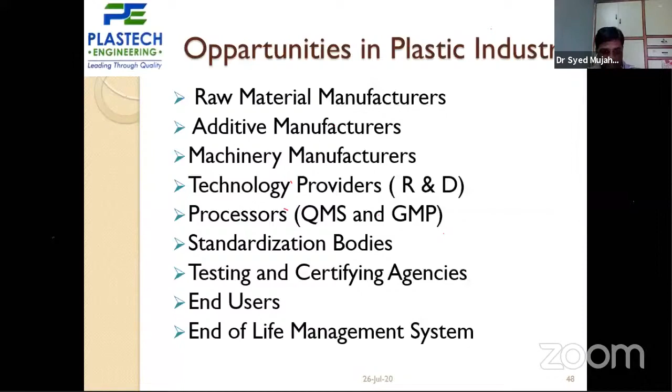You can manufacture raw material from extraction of petroleum products, or additive manufacture—I mean additive components. Whatever additives we are adding in the plastic, you can manufacture those too. So all these scopes are there.

So, plastic's future in India—it is one of the leading sectors, expanded almost 15 to 16%. The growth rate of plastics is almost 15 to 16% annually. It's the biggest contributor to Indian GDP, and almost 10 million people are dependent on this industry.

So almost 10 million means 1 crore. Our population is 1.3 billion, and almost 0.8 to 1% of people depend on this one. So it's giving very good GDP—almost 5 to 6% of GDP is coming from the plastic industry.

20% contribution is in this industry from big players like Reliance or Adani groups, and the remaining 80% are small manufacturers like me. They don't have big investment, they don't have crores of investment.

Maybe just a few lakhs—even with that you can properly plan. You can plan with a few thousand also, especially if you want to do trading in this, you can start this business with thousands.

The biggest plastic industry is situated in Gujarat, because industrially, Gujarat is one of the best states in India. Even in plastics, almost 55 to 60% of production in India comes from Gujarat. This is not only in automobiles—highest consumption is in packaging and agriculture, and after that it comes to automobiles.